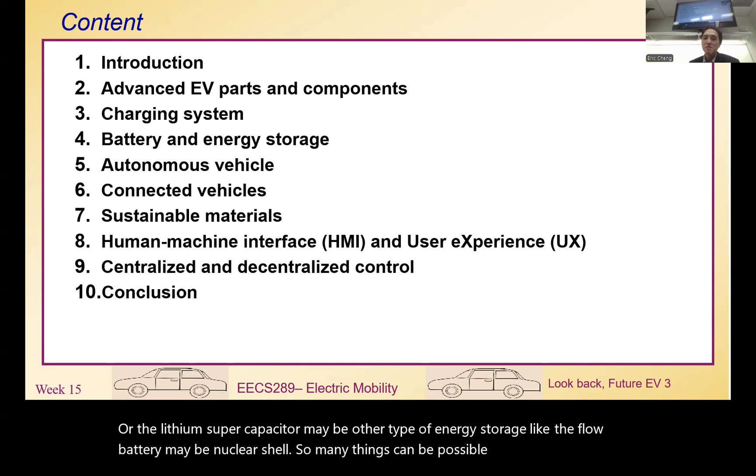Maybe other types of energy storage like the flow battery, maybe nuclear cells. So many things can be possible. Number 5 will be autonomous vehicles. Of course, all the vehicles today do have some kind of autonomy. So how are we going to deal with them? What's the future development on this topic?

And then once we've got autonomous vehicles, we may think about the connection, how the vehicle can be connected. We call it the connected vehicle. So that could be one of the major topics. When all the vehicles have certain computational or AI components, then the connection will get easier and much better. So how we communicate between EVs can give a better advantage.

Number 7 will be sustainability. At the moment, in EV development, many components inside are not really sustainable. For instance, the battery. Most batteries only have a single lifetime. At the end of life, we just landfill them. So that's not really economic. That means we need to think about how to make the materials used in the EV more sustainable. So that's an important area.

At the moment, in most mass production today, we only think about how to manufacture the item at low cost. We did not think about recycling. So every day when you go to the transfer center, the dump site, you see a lot of rubbish, garbage there. They just throw away the old model because they don't care about how to recycle them. With green technology and environmental pressure, I think we need to look into how to use more sustainable materials.

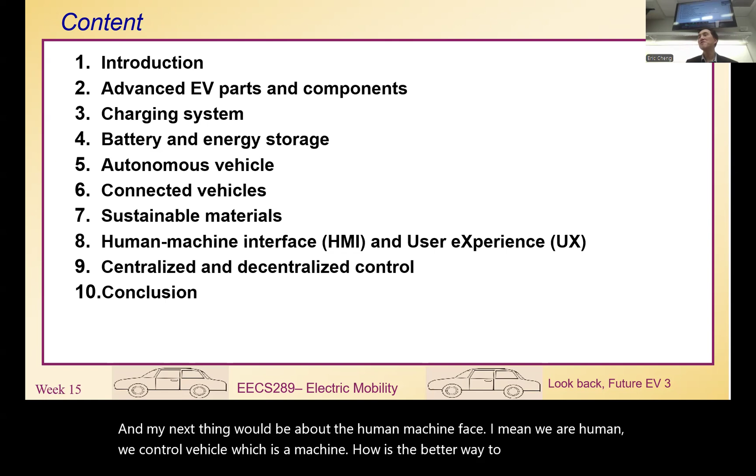And the next thing will be the human-machine interface. We are human, we control the vehicle, which is a machine. What is the better way to interface them? We call it HMI. We have so many different types or configurations for HMI. So how are we going to improve that? How do we control the vehicle? At the moment, we're using autonomous vehicles, but in the future, how are we going to connect the human to the machine?

And that also relates to user experience, how the user experience can help us determine the best way for HMI. And then we're also looking into centralized and decentralized control in EV design. There are a lot of configuration architectures in the EV system. Inside or outside the EV, we also have different kinds of configurations. So we're going to look into that. Those are the topics we're going to look into for future vehicle development.

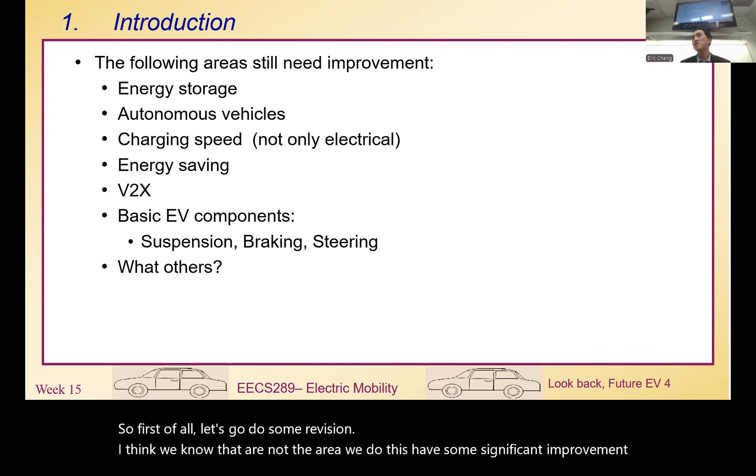So first of all, let's do some quick revision. We know that a lot of areas in EVs need significant improvement, including energy storage. We always complain about the battery, right? The battery, including energy storage density, safety, how to make it low cost, and the recycling problem. We always need improvement. So that could be one of the EV research topics we need to look into.

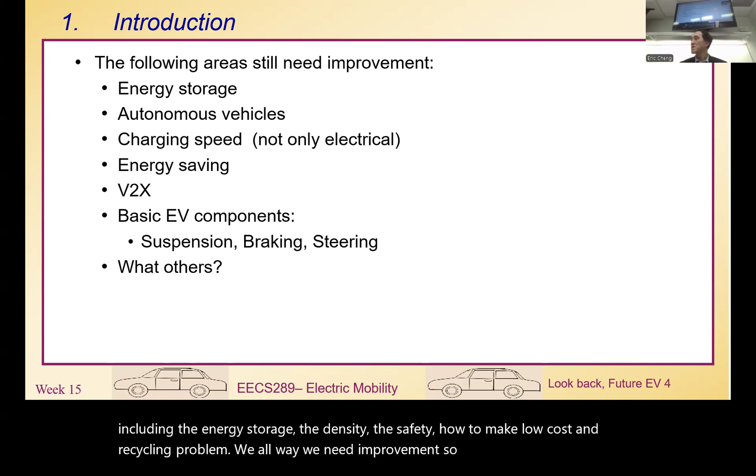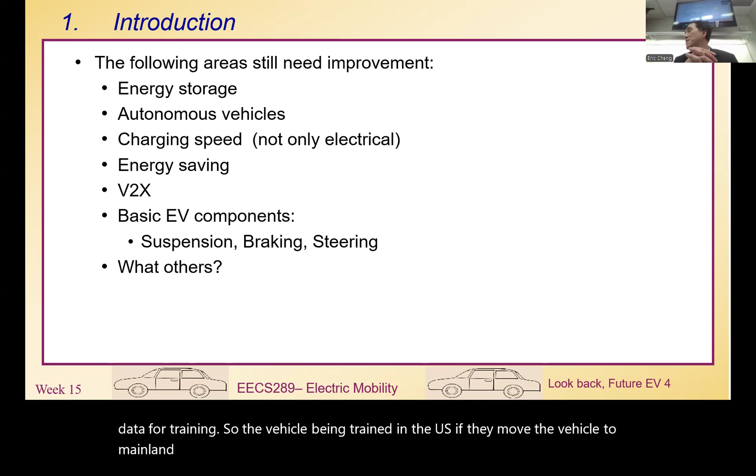And autonomous vehicles. Vehicles like Tesla have full self-drive capability. Once you pay $100 per month, they are able to provide that to you. However, there are still a lot of issues for autonomous vehicles, including training. We need a lot of data for training. A vehicle trained in the US, if you move it to mainland China, may not work really well because the road conditions are quite different. So we need a large database for the vehicle to understand the environment, to train it, because there are a lot of scenarios the vehicle needs to learn.

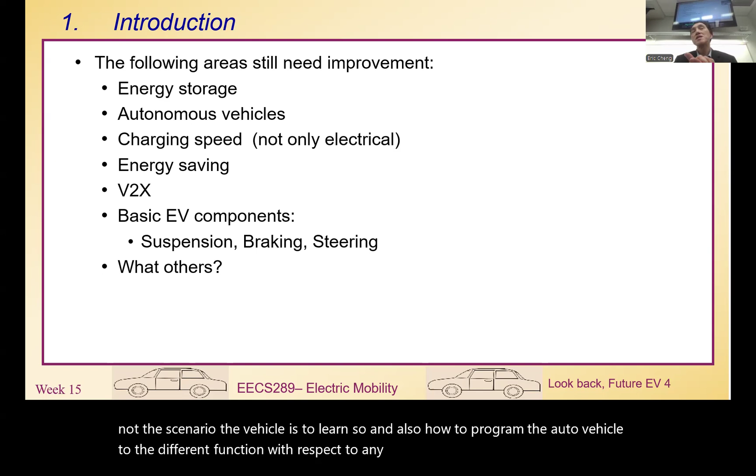And also how to program the autonomous vehicle to have different functions with respect to energy saving, operation, convenience, and also nighttime driving, whatever. There are many things we need to program for different directions, different performance.

And also charging. The key thing for each vehicle is the charging time. At the moment, rapid charging, ultra-fast charging, takes say 30 minutes. Of course, users prefer to have 3 minutes, right? So how are we going to do that? We know that we can't have too high a charging speed, mainly because of the power source. We don't have a sufficient power source. The charger power would become 10 times higher. That's impossible for power electronics. The size of the charging network would be too high. So it's impossible. We have difficulty understanding how to proceed with ultra-fast charging.

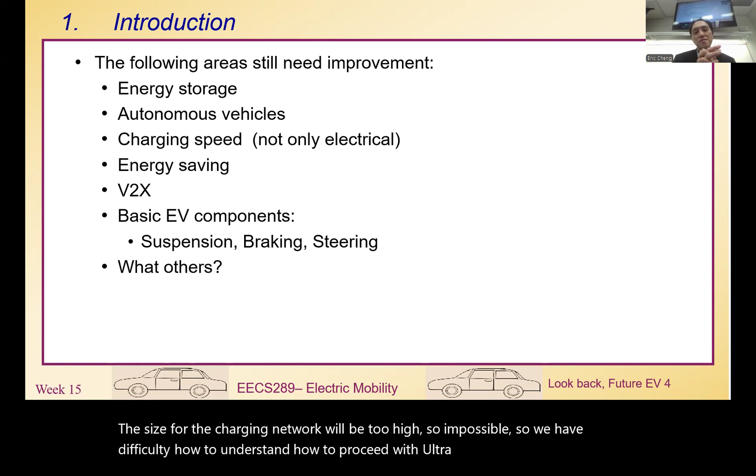And then we're also looking into energy saving, how to improve overall energy saving by improving the efficiency for each component or operation.

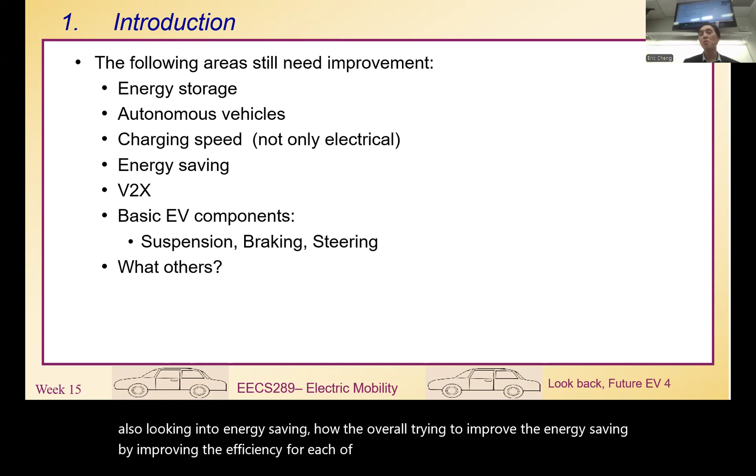Vehicle to everything is something we have been talking about for at least the last 10 years. We look into how the vehicle will connect to many other systems, including vehicle to vehicle, vehicle to building, vehicle to customer, vehicle to whatever. There are many things we can connect. So how to explore that and how to best perform it is something we need to look into.

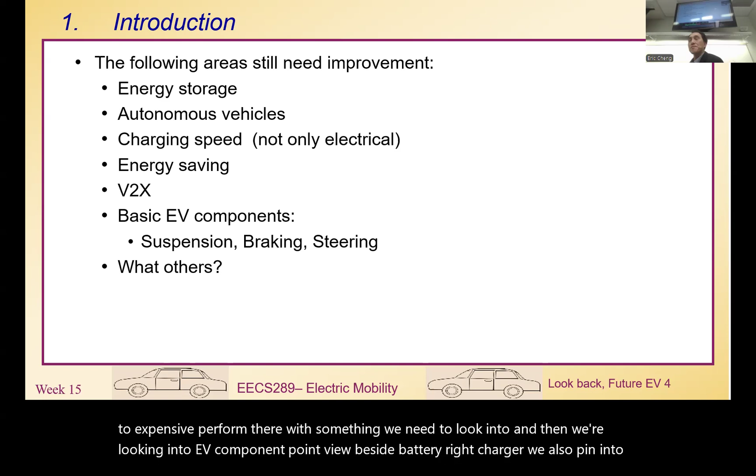And then we're looking from the EV component point of view, besides battery and charger. We're also looking into many other internal components. Many components in the past were mainly based on mechanical, pneumatic, or some kind of hydraulic system. But once you have electric, you can convert them into all-electric components, like the suspension system, braking system, steering system. You can convert them all into electric.

So that means how we develop these components. We do have many similar components in the EV, but we'd like to see 100% electric. Would that be possible? Which components can we take further to become more electric? So that's the thing we need to look into.

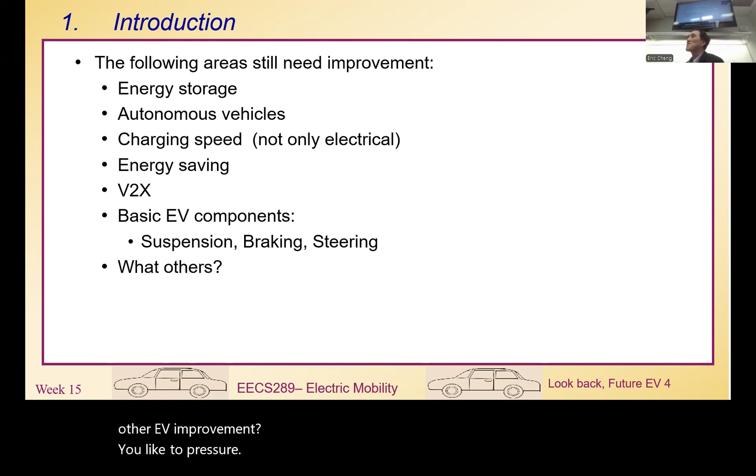What else can you think of besides these fields? Can you think of any other EV improvement you'd like to pursue? Any comment for this page? You've been working on this for nearly one semester, right? What other improvement would you like to have? What next research area? I'm trying to get more ideas from you to write my proposal. You see, these are the major areas we now have for EV, but I may overlook something. I need your support. What do you think? What next?

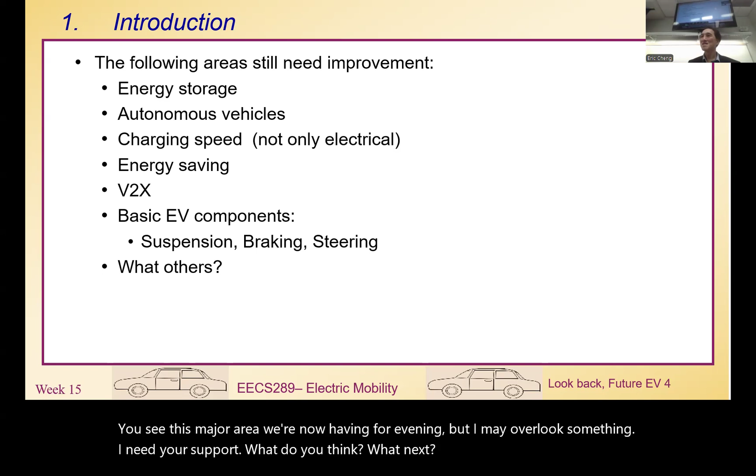Think about that. I will have one question in the final exam. One question will be, what do you think of besides this? What other area may you think of for EV future development? Okay. Anyway, let's look at different parts first.

You see, for advanced EV parts and components, there is much development on the motor. We'd like to develop new motors, intelligent motors, high performance motors. Even for the inverter to drive the motor, we want to find different kinds to do that, including how we integrate the motor together with the inverter. We're also looking into many power converters. In the EV, we have to manipulate different voltages, so we need higher efficiency and high power density for the converter.

Like the charger, we think in the next few years the charger power level needs to go up. So instead of 30 minutes, say 3 minutes, maybe not 3 minutes, 10 minutes, we anyway increase the power a few times higher. With such high power, how are we going to do that? How do we improve the power electronics to do the job?

Motor. We tend to integrate the motor and the wheel together, in the so-called technology called direct drive. Direct drive is a technology we'd like to see for the connection between the motor and the wheel. Direct drive tries to minimize the physical connection between the motor and the wheel. So in this case, we can reduce all the mechanical connections.

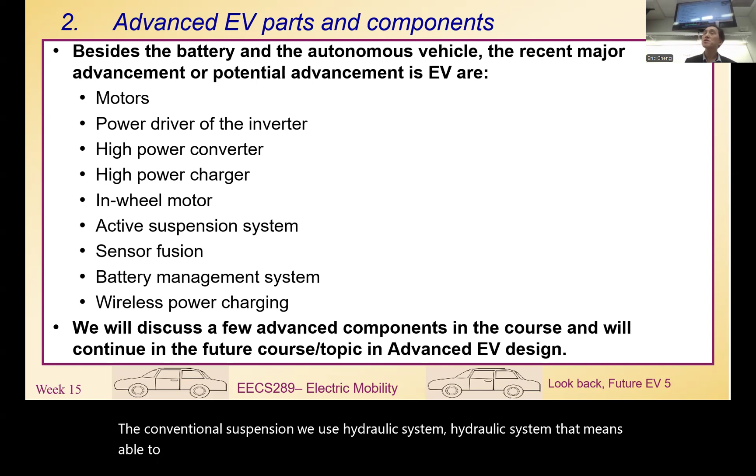The conventional suspension uses a hydraulic system. A hydraulic system is able to provide high force, but it is not adaptive. Not adaptive means if your vehicle passes through a lot of humps or uneven surfaces, you can still see the vibration, because all the road areas are different. You can't have a single suspension able to adapt to all the different road surfaces.

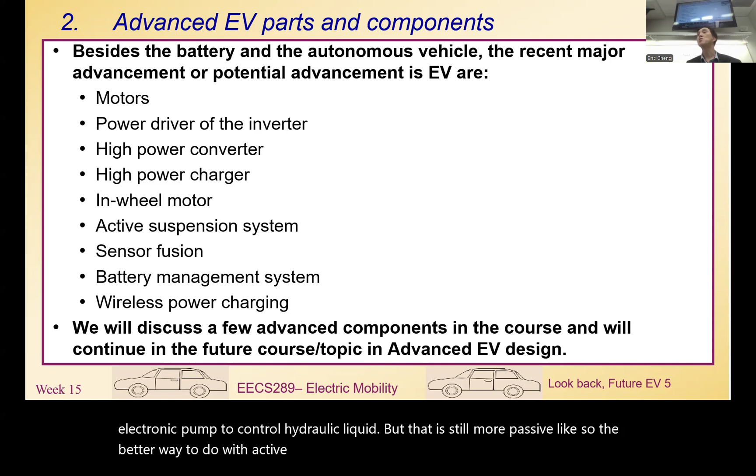So that's why conventionally this suspension is called passive suspension. They use some electronics to control it, to make it better, using an electronic pump to control the hydraulic liquid. But that is still more passive-like. So the better way is active suspension: you use a linear motor or some electronic actuation system to replace the suspension. That's the future work we need to do.

Next thing will be the sensors. Our vehicles today are getting more and more sensors. Conventional vehicles don't have that many sensors. We may have a tail sensor to detect when you reverse, maybe other sensors, but not many. But today, electric vehicles have many sensors. Like a Tesla vehicle, 8 cameras to view all the angles. And then you also have GPS and a lot of speed sensors, many things.

So in the future, we need to think about how to integrate all the sensors together, called sensor fusion. How to fuse them together and then see which sensor would be more important for the driving condition, for the present road condition. So that's important.

Another area will be the battery management system, BMS. The battery is getting more complicated. Today we not only talk about the battery; it could be something else, a supercapacitor, an integration between battery and supercapacitor, or a fuel cell. So all this energy management system, not only battery, will also need further work.

So how to ensure that each battery cell inside the battery system is in good condition, healthy, and safe, and can share the voltage and current properly. Because a vehicle has hundreds of cells. How to manage hundreds of them? You can't put on hundreds of sensors, too costly. You don't know which one is which, right? So that's also a lot of management thinking.

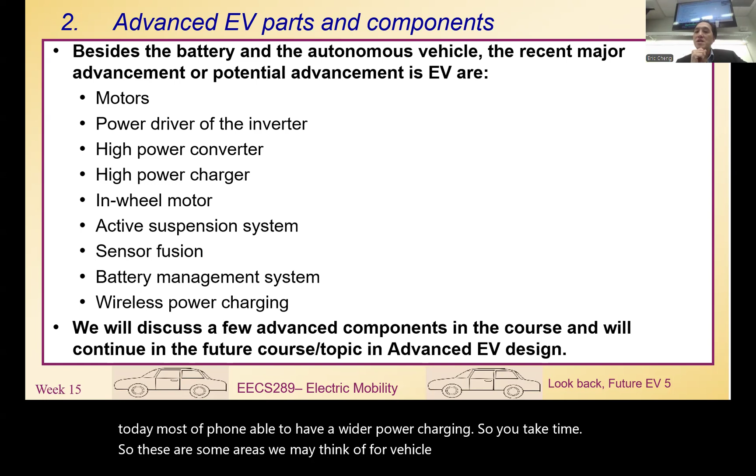However, at the moment, really few vehicles, especially commercial vehicles, have wireless power charging yet, because the facilities are not here yet. But that will be a really important area of development. As I mentioned before, with phone charging 20 years ago, we didn't think about wireless power charging. But today, most phones have wireless charging. So it takes time. These are some areas we may think of from the vehicle point of view for future advancement.

So that's why you can see that in today's electric vehicles, we don't need the hump under the rear seat, particularly on the rear axle, which we usually had before. And in the central console, we don't have any transmission there, so we don't have this kind of hump there. So using the in-wheel motor, we're able to improve the interior design much better than in the past.

And also, of course, we're looking into the weight. The weight will be much lighter, and the efficiency could be higher. Why is that? Because we eliminate all the mechanical connections: gearbox, clutch, transmission, shaft, they are all eliminated. If each component is 90% efficient and we eliminate 4 of them, we have an improvement of 40% efficiency. That's nice to have.

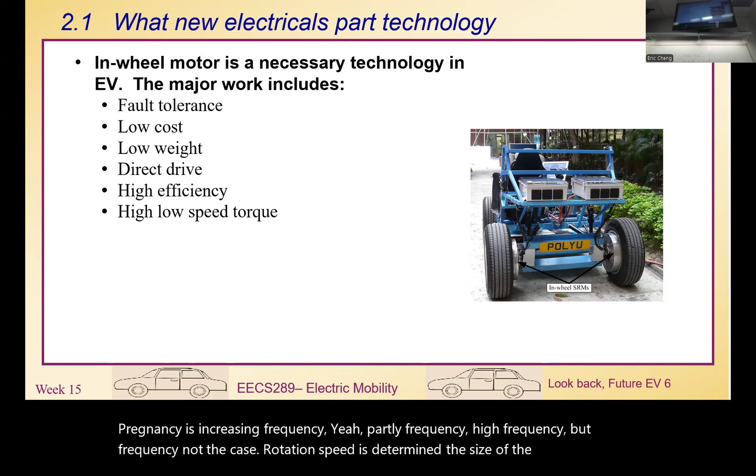Why can they do that? The magnetics have not changed that much. The magnetic design cannot change from that size into that size within 50 years. The Maxwell equations are still the same. Frequency? Yeah, partly high frequency, but frequency is not the case. Rotation speed determines the size of the motor. We still prefer to use 3,000 RPM, 5,000 RPM. Due to the rotation speed for the wheel, 500 RPM is still a disaster.

But what they have done is forced cooling. Why has their motor become so small? They use less copper, less iron, but forced cooling, liquid cooling. In this case, they can remove the heat instantly. They always keep the temperature of the winding low, so they don't produce any more heat. They're just using a pump to pump the liquid to cool. That's the way to improve the power.

But for an in-wheel motor, can we do that? Can we have forced cooling? More complicated, because the wheel is rotating. How can you deliver the liquid to the motor? Most in-wheel motors are air-cooled. Air-cooled and liquid-cooled differ by so many thousand times. So that's why we have a lot of difficulty in in-wheel motor design. That's the research area we look into.

There's also fault tolerance, because with anything exposed to the atmosphere, the fault conditions need to be reconsidered. We have less protection, right? Exposed outside, there can be damage, dust, water; shielding, everything needs to be reconsidered. So those are the research areas we look into for the in-wheel motor.

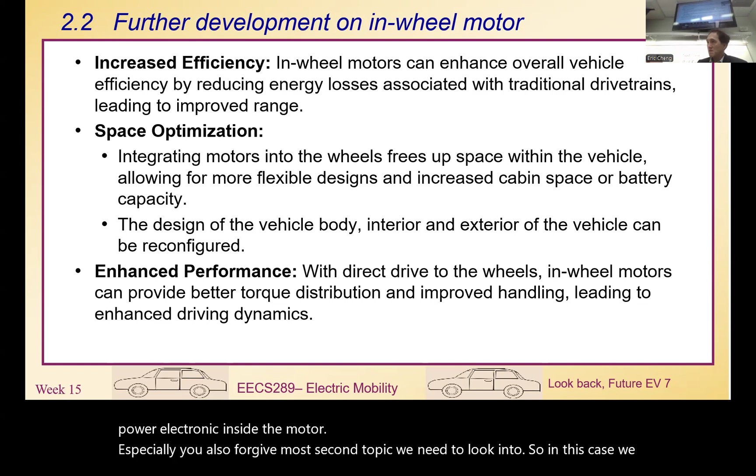And also enhance the performance of the motor drive. So usually, nowadays, we tend to put the motor driver, like the inverter, together with the motor, integrate them in a single component. So inverter integrated in the in-wheel motor as well. We try to integrate them. So sometimes you think about, can we also put the power electronics inside the motor? Especially also for the in-wheel motor. This is another topic we need to look into. So in this case, we can just put DC wire to the in-wheel motor, that will simplify everything. So that's another interesting topic we need to look into, also a major topic.

And modular design, how to make the motor become modular. So in this case, if you want to change the motor, it's quite straightforward, you can just use a modular method to change them. And also how to control that. And not only the control method, the control including the safety, the steering, the power conversion, and also a lot of optimization we need to look into.

And then we're also looking into material development. What kind of material can we use? That material should be able to be exposed to a wide temperature environment. You see, when a motor is inside the vehicle chassis, then the temperature is more controllable. But when the motor is outside the car body, the temperature variation can be much larger. For instance, some magnetic material inside, you expose to the external part, then during the day, temperature can be really, really high. At night, the temperature can be really low. The magnetic material could be a problem.

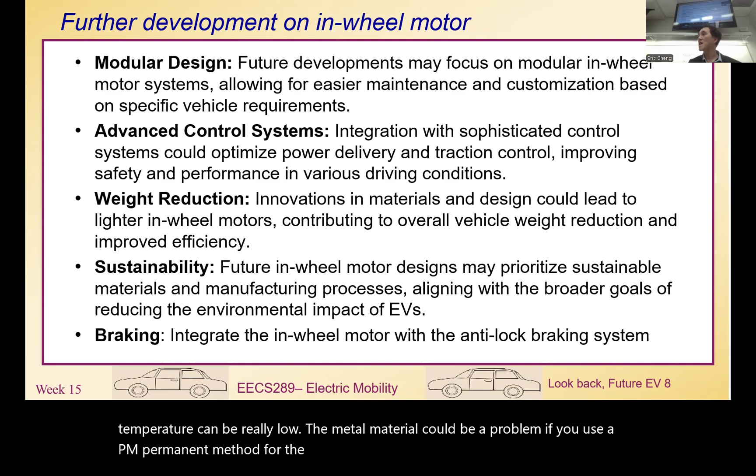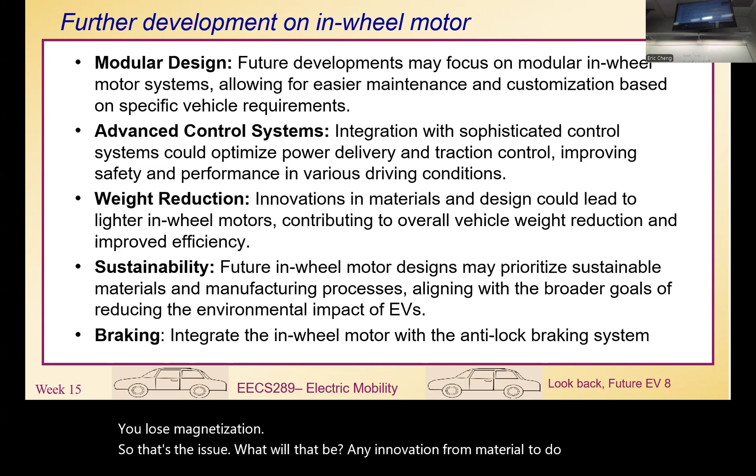If you use a PM, permanent magnet, for the motor, then you probably can have a smaller size of motor. But permanent magnet is not really happy about a wide temperature range. Especially at high temperature, you lose magnetization. So that's the issue. Would there be any innovation for material to do? And how to reduce the weight, improve the efficiency? That's also something we need to look into.

And also sustainability, how to make all the material and manufacturing capability sustainable. Material can be recycled. Because you see, a motor, when you expose it to the atmosphere, probably the lifetime may be reduced. Then we may need to replace the motor more often than before. So in this case, we may need to think about, can the motor become sustainable, recyclable?

Another issue is about the braking. The motor, of course, itself can provide electronic braking. But usually for all EV motors, by law, we also need to implement mechanical braking for safety. One will be electronic braking using power regeneration, plus mechanical braking for safety, for last-moment braking. So that means when you put them together, we got two braking systems inside the vehicle.

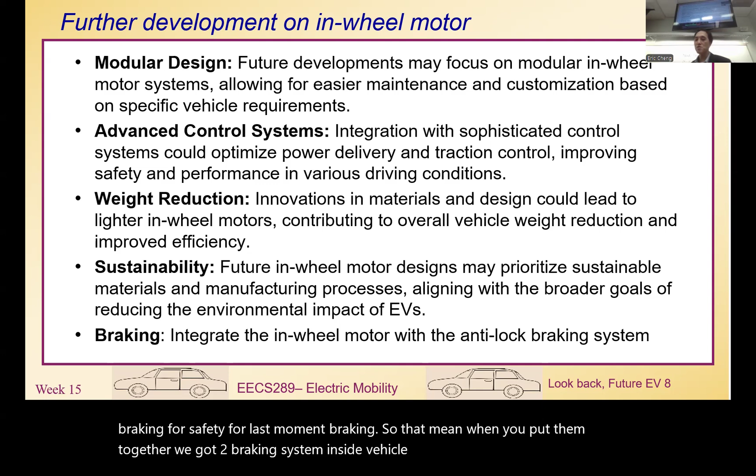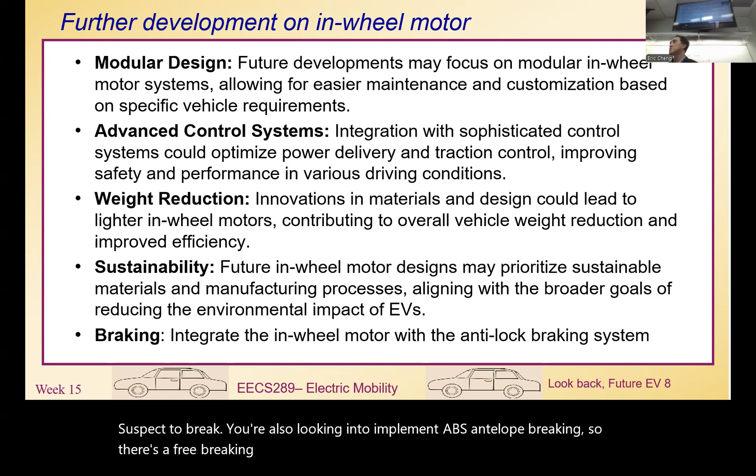Plus, you're also looking into the anti-lock braking system. Lock means usually the brake pad or the shoe pad to brake. You're also looking into implementing ABS, anti-lock braking. So there's three braking technologies you all need to put into the EV motor. So how to manage them properly is something we need to look into.

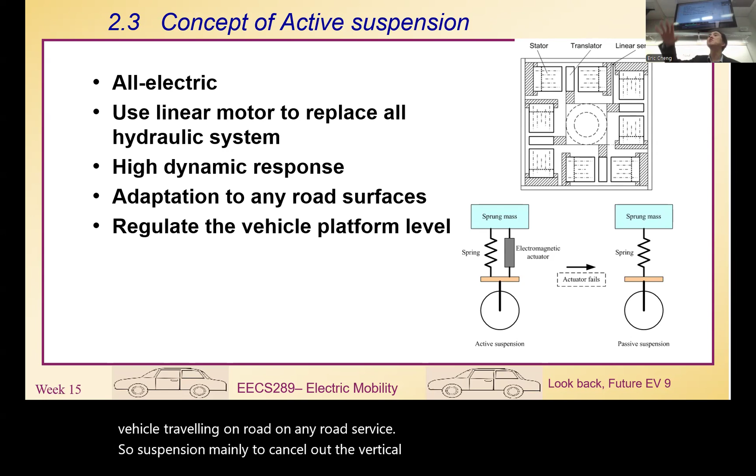So another important area is called active suspension. Suspension now is not so critical a component. Without suspension, the vehicle can still move, but it just feels too bumpy. You're not comfortable. With a nice suspension, when you sit in the vehicle, you won't feel anything when the vehicle is traveling on any road surface. So suspension mainly is to cancel out the vertical acceleration, due to gravity, due to bumpy surface.

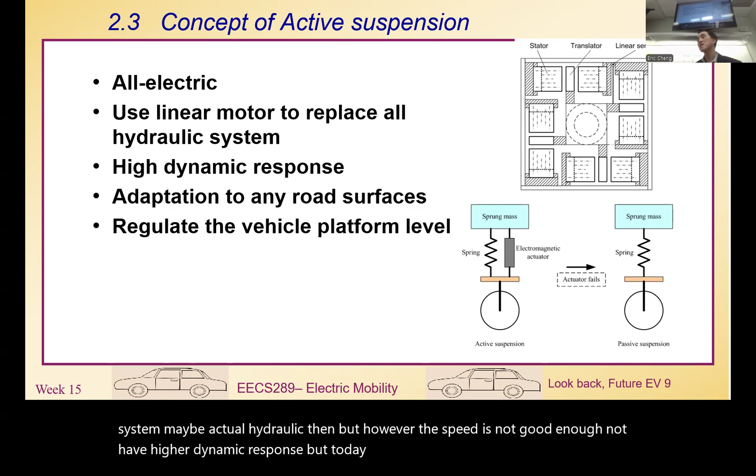Conventionally, all suspensions are using a hydraulic system, maybe electro-hydraulic. However, the speed is not good enough, it doesn't have high dynamic response. But today, in this research area of future development, we want to use motors, 100% motor, to replace the hydraulics, because a linear motor can be 800 times faster than a hydraulic system. So that means in the vehicle, when you traverse any bumpy or uneven surface, all this vertical vibration can be canceled out. So suspension mainly is adapted to the vertical unwanted acceleration due to gravity, due to the road surface.

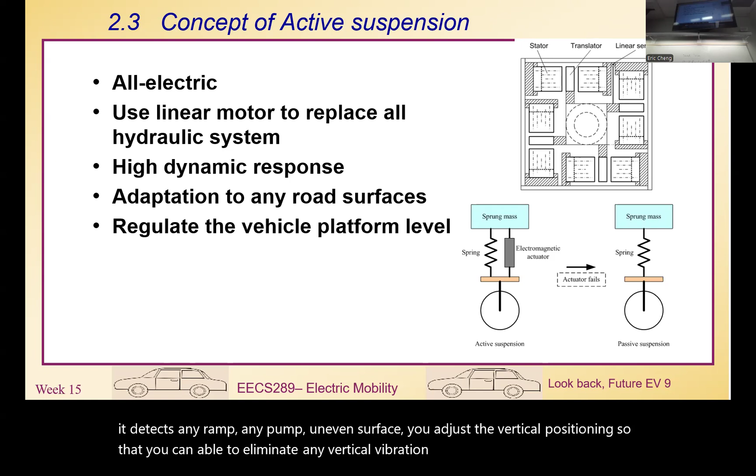So in this case, this diagram shows you one of my developments. We use 4 linear motors to control the movement of the 4 corners. Whenever you detect any ramp, any bump, uneven surface, you adjust the vertical positioning so that you are able to eliminate any vertical vibration. So that's the function of this. That means we are able to use a more active method, an electromagnetic actuator, to replace the shock.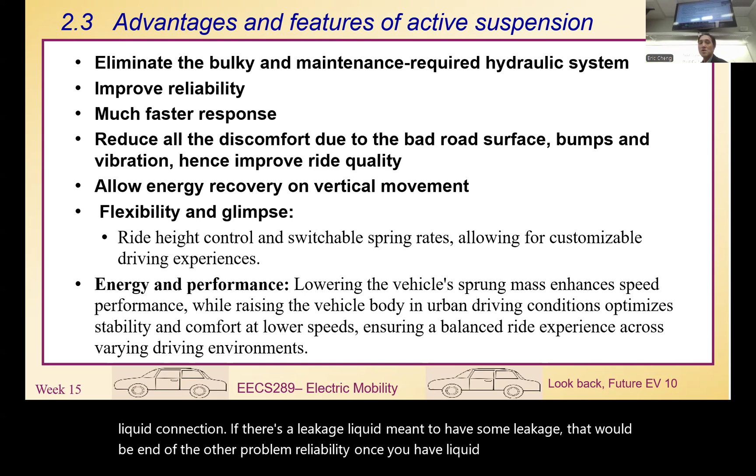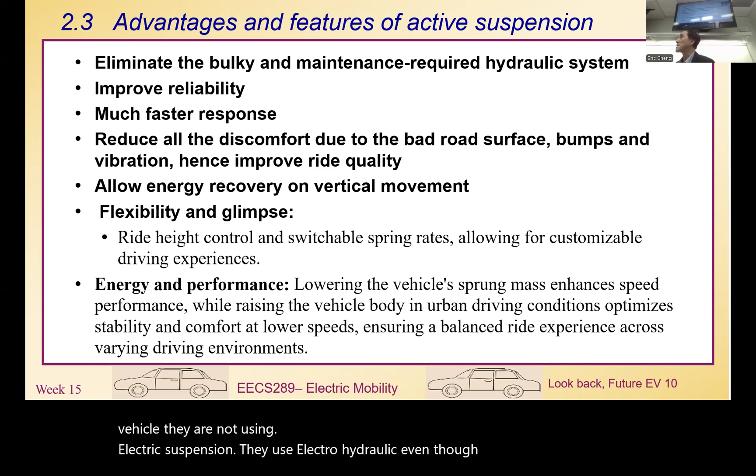So the good thing for the active suspension area will be you are able to eliminate the hydraulic system, because whenever we use a hydraulic system, we know that we need maintenance. With a hydraulic system, you need to maintain the liquid, you have to pump, you need to maintain all the liquid connections. If there's a leakage, that will end up with other problems. Reliability: once you have liquid flow in your vehicle, then you do have reliability problems. Right? Even today many electric vehicles are not using electric suspension, they use electro-hydraulic, even Tesla, because they don't have that technology yet. So that is a topic we need to go into.

And also you can see that once we have this kind of active suspension, any vertical movement, we can convert this vibration energy to go back to the battery. So in a way, we can have further energy saving. And also, it's also gimmicky. Once we do that, we are able to adjust the vehicle sprung mass. You know what sprung mass means?

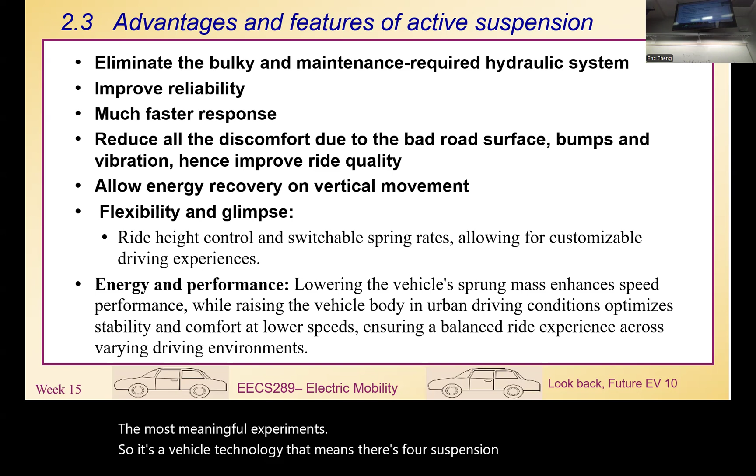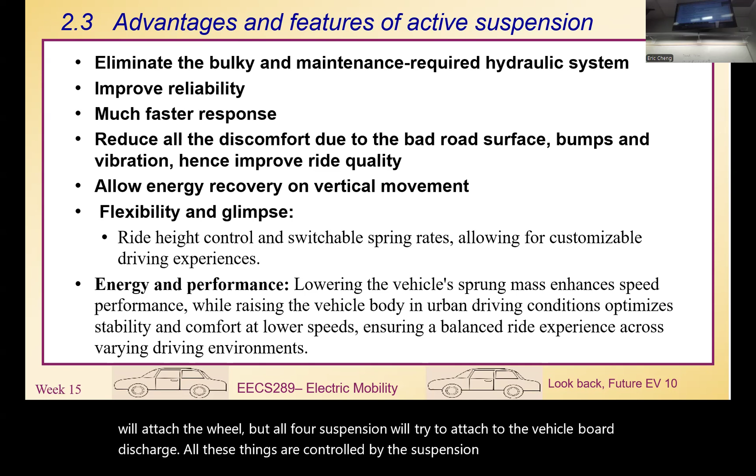It's a vehicle technology term. There's the suspension here. The suspension attaches to the wheel, but all four suspensions attach to the vehicle body chassis. All these things are controlled by the suspension. We call it sprung mass. So that is to say, for the whole vehicle body, when you sit in the vehicle, the vertical position of the sprung mass can be adjusted by the suspension. In some high performance vehicles, when someone wants to sit in the vehicle, they lower the vehicle body to let you sit easier. Once you sit inside, they raise the vehicle body because they use active suspension to control the vertical positioning.

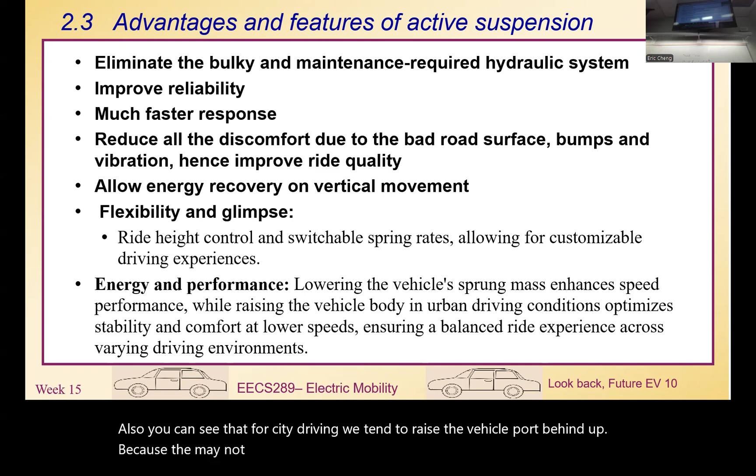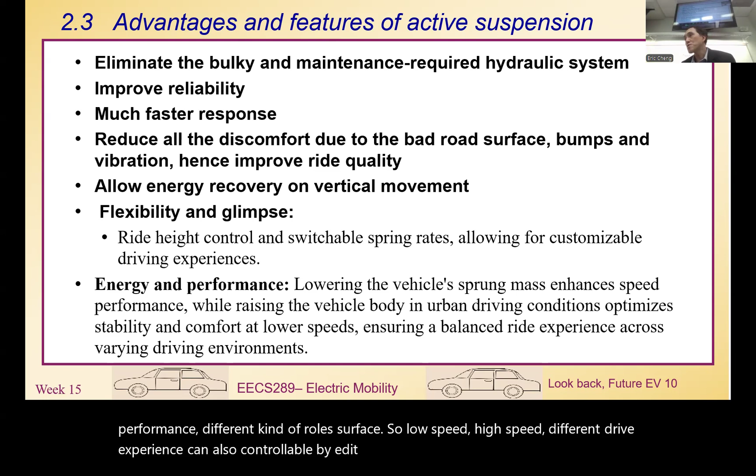Also, for city driving, we tend to raise the vehicle body because the road surface may not be too even. There are a lot of road works there. But on the highway, the road surface will usually be more flat. They will lower the vehicle body so that you can reduce the air resistance. So the active suspension is able to support different performance, different kinds of road surface. Low speed, high speed, different driving experiences can also be controlled by active suspension. But if you use hydraulic suspension, you don't have that capability. So for future vehicles, we do need to integrate this kind of active suspension feature to improve that.

So the difficulty in design will be how to maintain high force in the vertical suspension. For an electric vehicle of, say, 4 tons, each suspension needs to control 1 ton, 1,000 kilogram force. That's not a simple job. And also you need to maintain high speed. When a vehicle passes over a bump, you usually need to finish the whole response in about 10 milliseconds. So 10 milliseconds plus 1,000 kilogram force is not an easy job. The power level for the suspension is quite high, but you need to control it with a small coil. So the magnetic design is quite difficult. That's another area we're not quite sure how to do properly.

We have that demand. For electric vehicles, the weak point is we have to integrate with a hydraulic system. The whole vehicle is all battery and motor, but the thing left behind is the suspension. Suspension is still hydraulic. But we still don't have a good solution to make the suspension all electric. When you go for electric vehicle maintenance, you need to check the suspension liquid, suspension performance. In theory, you don't need to worry too much about maintenance for EVs, but not for all components. Suspension is something we need to look into. And another thing: once you use the linear motor, you need to adjust the vertical position.

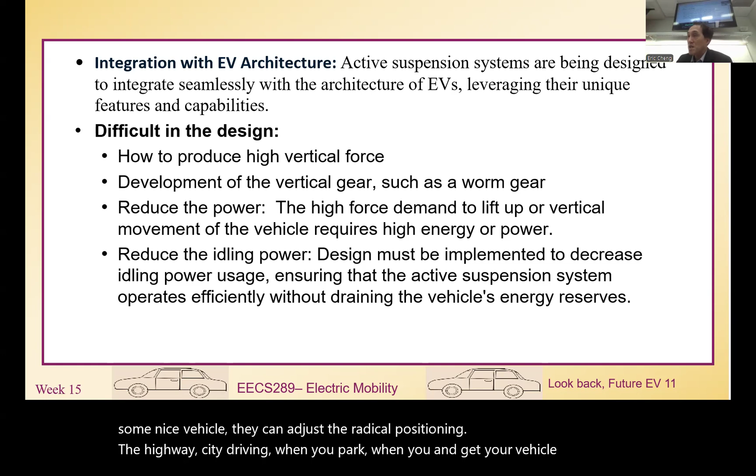There are some cars which can adjust their height, right? Yeah. You go down, like, while standing. So that's also the normal hydraulic suspension. A hydraulic system can adjust the vertical position. Just like when you go for some nice vehicle, they can adjust the vertical positioning. In highway, city driving, when you park, when you get out of the vehicle, they can adjust it. But they are using hydraulics. Hydraulics can do the job without any problem.

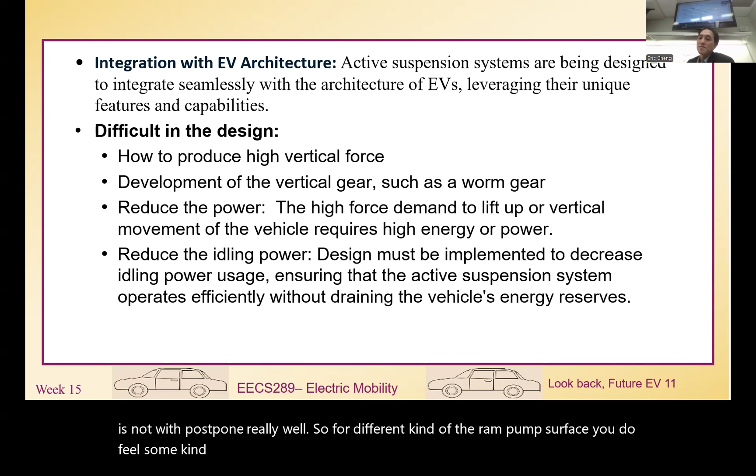However, the response time for hydraulics is too slow. When you go over a ramp, it doesn't respond really well. So for different kinds of ramp or bump surfaces, you do feel some kind of vibration, which you don't quite like. That's why we go for active suspension, but active suspension still has a lot of issues we need to research. It's not sufficient to overcome everything, but we'd like to have an active suspension to eliminate the hydraulic system or the mechanical system. So that's one of the developments we'd like to see in the near future for EV.

Another area will be wireless power transfer for charging. Of course, we know that wireless power transfer is actually a major topic in electric vehicles or in power electronics. I think if you look into all the research publications, roughly about 25% of all the papers are in this area. So it must be a big research topic. So many researchers are looking into it, although it's still not yet in real application. That means many researchers, many professors think it's a really important area.

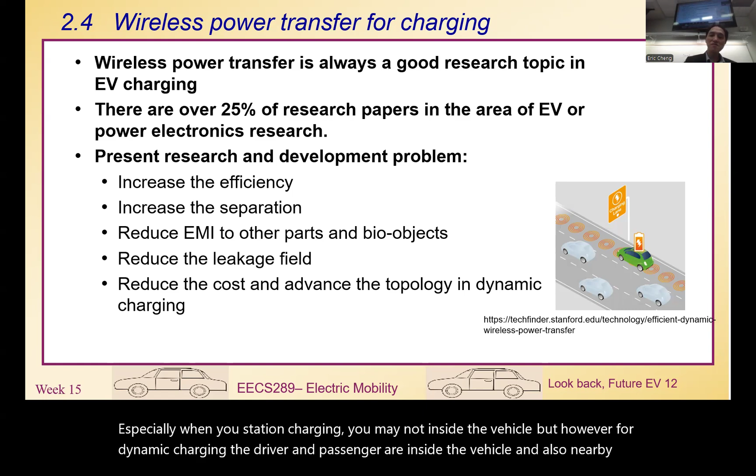Then would that affect the user? With stationary charging, you may not be inside the vehicle. However, for dynamic charging, the driver and passengers are inside the vehicle, and also nearby pedestrians. So that's something we're not quite sure how to examine. That's not only an electrical engineering problem, but also medical research.

The investment must be quite high here. You can see the many coils. We need coils, so we need a power supply, we need an inverter. And then the cost is not quite sure. It certainly will be expensive, but how are we going to reduce the cost, simplify the technology, simplify the topology to do that? So that's the thing we need to look into.

Next thing is the charging system. The charging system always becomes important for EVs, right? For the charging system, we prefer really high power charging, so charging within a few minutes is something we'd like to have. With high power charging, we need to look into the cooling, thermal management, efficiency, power density; all these things will be good research topics.

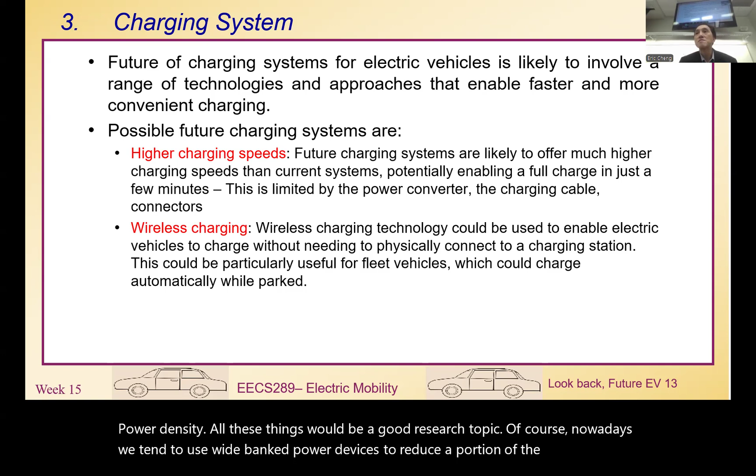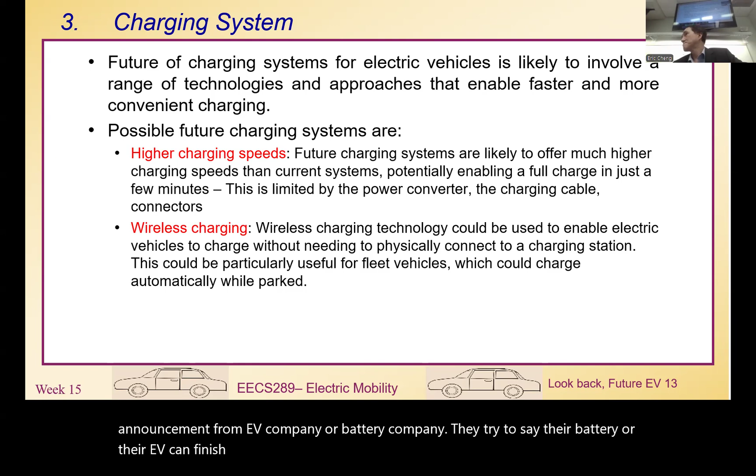Of course, nowadays we tend to use wide bandgap power devices to reduce a portion of the problem, but the problem is still there. But high power charging is one of the important developments anyway. All the research papers, all the major announcements, they all talk about how their battery or EV is able to charge within a short period of time. That's usually an announcement from an EV company or battery company. They try to say their battery or EV can finish charging in a few minutes. That's an interesting point, but the technology is still not there yet.

Wireless power transfer still needs further development, how to implement it properly in the vehicle. So that's something we need to look into. And the charging system also includes the research of V2G, vehicle to grid. I think vehicle to grid is mainly bidirectional charging for the vehicle. Today, 99.9% of vehicles are not developed for V2G. They only have unidirectional, not bidirectional. Then how to do that? We need cooperation, maybe international guidelines or legislation to do that.

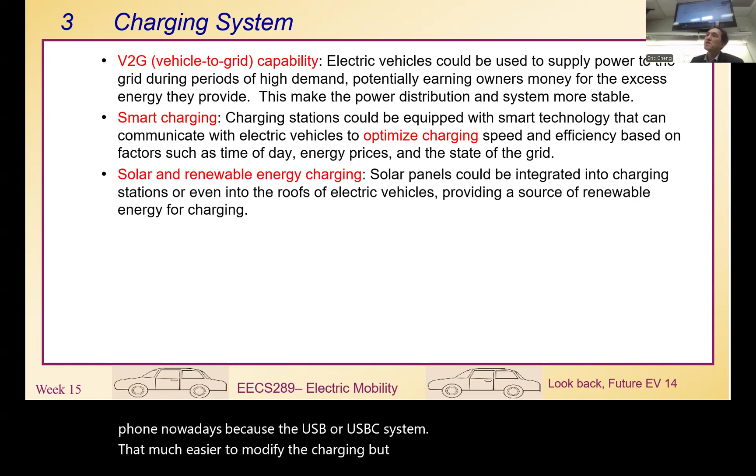The thing is, all the EV companies are separate or located in different countries, with different systems. How they can unify into a single system for the grid is uncertain. Even the power grids are all different in different countries. So that's why V2G is really a big problem. It's different from phones. Phones nowadays have USB or USB-C, so it's much easier to unify the charging. But for vehicles, different vehicles have different voltages. Different countries have 100 volts, 120 volts, 110 volts, 220 to 380. They all have different voltages, different frequencies, different kinds of systems. So V2G is still a major issue.

Smart charging. How to make sure a charging station can communicate with other charging systems. When we have a limited number of chargers but an uncertain number of vehicles, how do we mesh them together? You need really good scheduling, very good timetabling, really good power connection. So all this will be another issue.

And also safety. Today we have another new requirement for charging stations to have safety implementations, including, in case a vehicle catches fire during charging, how you're going to accommodate that. As we mentioned last week, fire disasters happen much more often during charging than while the vehicle is in motion. So charging needs to look into safety as well.

Then because of green technology, we also think charging should be related to renewable energy. How we implement solar power, wind power, hydropower, or maybe solar vehicles together. That's something we'd like to see in future charging systems. Today we are working on a project trying to convert a whole UC vehicle, the golf car, to solar power. We'd like to see solar power used to power up vehicles in the near future. That is quite feasible because for many vehicles with really light loads, say a golf car, the power level is only a few hundred watts, so we are able to use solar power to produce the energy without using charging.

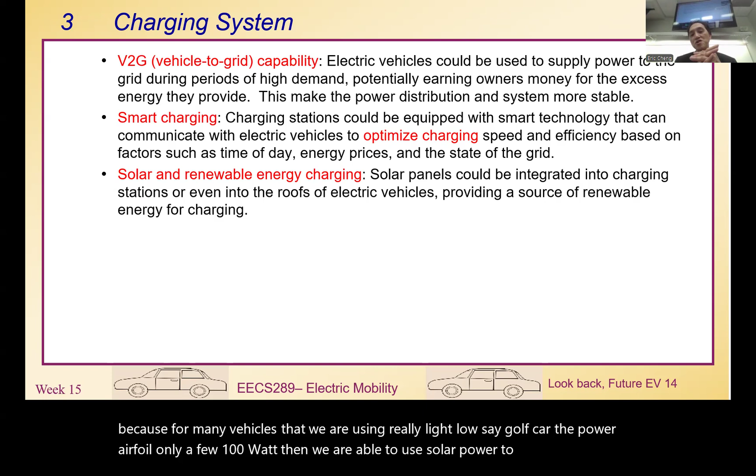We're also looking into battery swapping, right? We have been discussing battery swapping for quite some time. We know it will happen, but which one will be the winner, we're not quite sure. Battery swapping and direct charging are two completely separate concepts. Battery swapping has been quite successful in a few locations and also in scooters, but we're not sure whether it's possible in large vehicles. With large vehicles, we need robots and machines to do the swapping. So in this case, we need a lot of support from the government.

So dynamic charging, or so-called move and charge, is another technology. It's a major discussion in all charging systems. But beside these two, we're also looking into charging not only by electrical means, but also by other means. Like the flow battery I discussed with you, we are using a liquid form of charging, charging the vehicle using electrolyte. So that will be much similar to gasoline charging. Of course, battery swapping is another way. We don't need to use electrical means to do that.

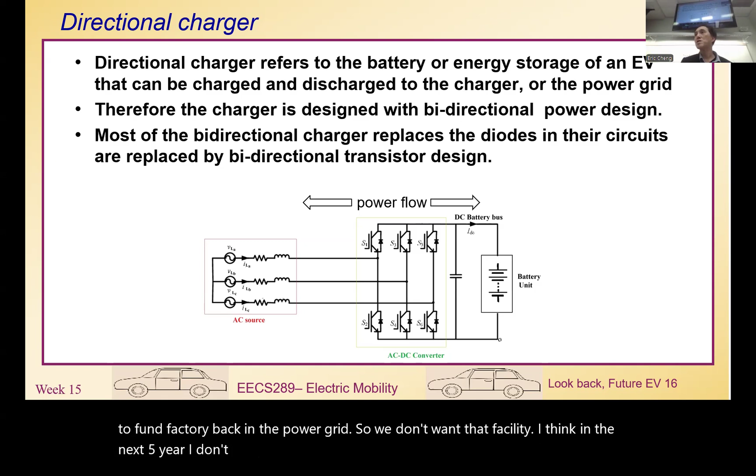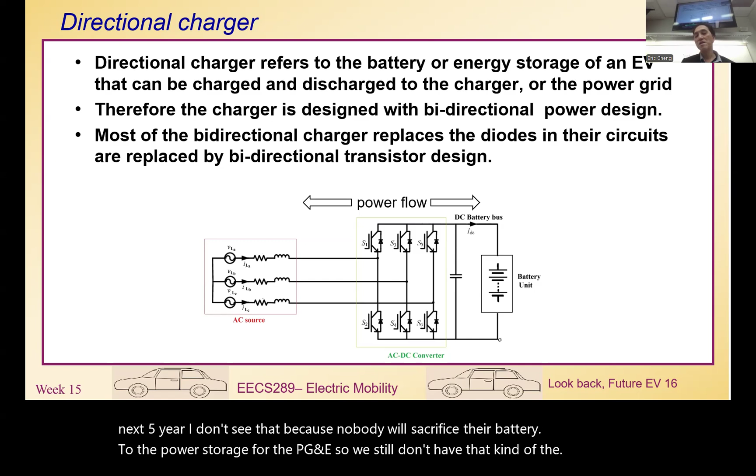At the moment, we don't have that, because for high-speed charging we use DC charging. They are all unidirectional. We don't allow power from the battery back into the power grid, so we don't have that facility. I think in the next five years I don't see that, because nobody will sacrifice their battery as power storage for PG&E. So we still don't have that kind of development. We wait and see for a few more years for any further work.

Number four is about the battery. The future development for batteries is something quite strange. Besides the normal batteries we've been talking about, like the lithium-ion battery, NMC battery, or lithium iron phosphate battery, a number of other batteries are being rapidly developed, like the solid-state battery. I think we also did some study on solid-state batteries. I asked you to check some YouTube videos about solid-state batteries, right? The major development for solid-state batteries is that the electrolyte will be solid. That will make safety much easier to control, and it seems the density, the charging speed, everything can be improved.

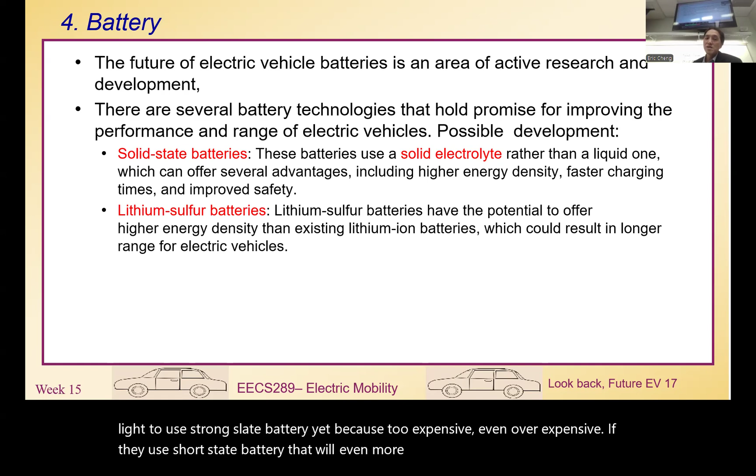But at the moment it's still very expensive and not yet mature. So no EV user likes to use solid-state batteries yet because they're too expensive. EVs are already expensive; if they use solid-state batteries, they will be even more expensive. So that means we need to wait for three more years.

Another similar lithium battery is called lithium-sulfur. From the publications, we see that this also has high potential. It has quite a few times the energy density compared to lithium iron phosphate or NMC batteries. So we wait and see if lithium-sulfur can have further development. Then other batteries like the lithium-air battery, lithium-oxygen. We also have the flow battery, and they are all possible.

Another thing is the fuel cell. At the moment, the hydrogen fuel cell has been developed quite well. But now we're looking at another development called the solid-state hydrogen fuel cell, using so-called solid-state to do that. So that's another newer technology we're looking into for fuel cells. At the moment, the PEM membrane fuel cell is getting some limitations because of the cost, the PEM membrane lifetime, and also the efficiency. So we're looking into new designs in hydrogen fuel cells to further improve that. But I think that will take a few more years.

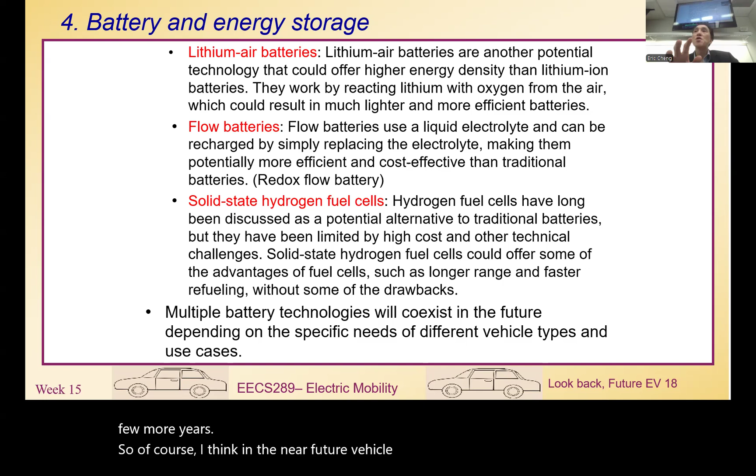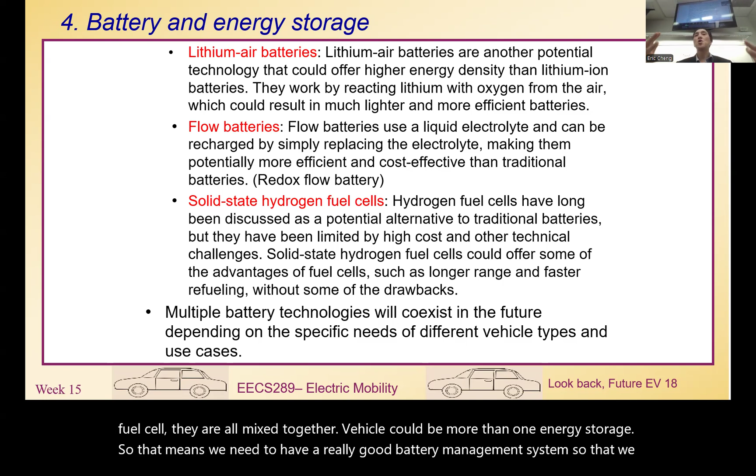Of course, I think in the near future, a vehicle could be a combination of many battery systems, including capacitors, batteries, maybe solid-state, maybe fuel cells, all mixed together. A vehicle could have more than one energy storage. So that means we need a really good battery management system so that we can combine and coordinate all the batteries together.

So materials are something we're also looking into for batteries, or maybe for many other energy storage devices. We're looking into better materials, including the electrolyte, the electrode, and the separator; they all need better materials. For nanotechnology, we have been talking about the electrode material. Today, electrodes just use solid material, but nowadays we talk about nanomaterials.

With nanomaterials in the electrode, we are able to improve the current density, which means they can handle high current. In a way, we can also improve the overall energy storage density, the specific energy. This material will also hopefully make the battery recyclable. Today, the battery is not recyclable.

So tomorrow, if we improve the material, we try to use recyclable battery materials so that from the day of manufacturing, the batteries are recyclable. Today, after we develop batteries, we're still looking for another way to recycle them. That is much more problematic.

For electrodes, we are looking into many new materials, like the silicon electrode that is being worked on nowadays to improve the electrode capability, and also conductive polymers to improve conductivity. So you can see there's a lot of new material work going on for battery development. Of course, 3D printing: we tend to use 3D printing to develop more complex battery architectures rather than simply an electrode plus a separator. That's another research area we can look into.

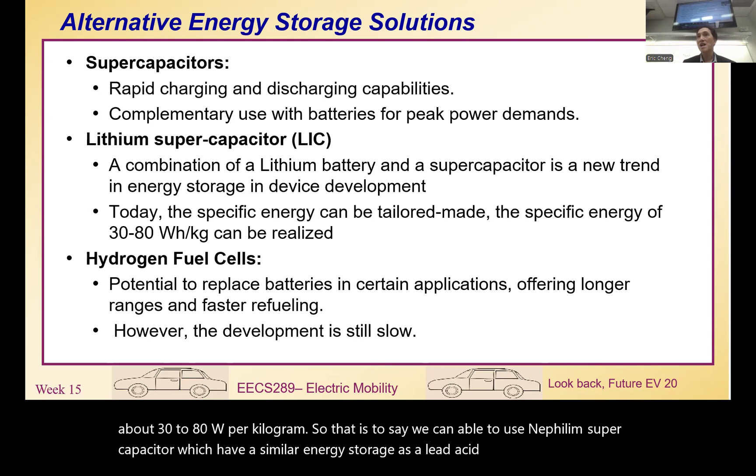But in the market, we usually see about 30 to 80 Wh per kilogram. That is to say, we are able to use a lithium supercapacitor with similar energy storage to a lead-acid battery, but the life cycle will be really good. The lifespan of a lithium supercapacitor is usually something like 10,000 cycles, maybe more.

So you are now using something like a lead-acid battery, but with a long lifetime and without the short circuit problem. With a supercapacitor, the short circuit risk is basically reduced. You can still have a short circuit with high current, but the capacitor will not explode. Chemical batteries explode because of chemical reactions and too high pressure. But for a supercapacitor, being electrostatic, the risk of explosion is less.

So the hydrogen fuel cell is another energy storage you can look into. We tend to use hydrogen fuel cells to replace batteries or replace a portion. But we see that development for hydrogen is still quite slow. As we saw in the presentation just now, the hydrogen fuel cell is still expensive and still has a lot of carbon emission. The hydrogen source is still a problem, so we do need to improve that.

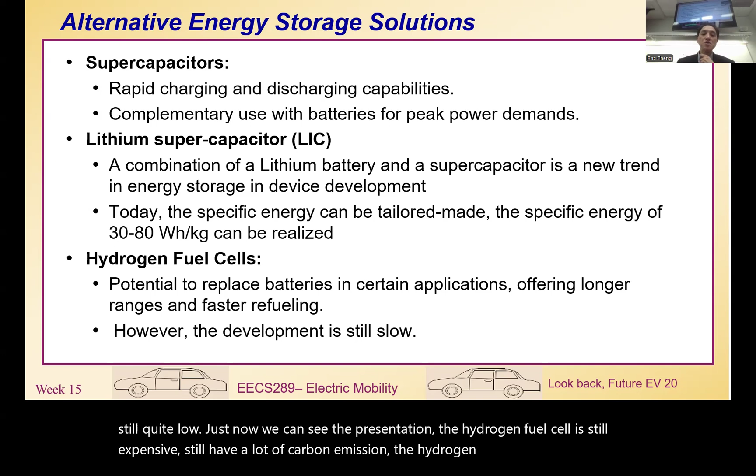So you can see the slow development of hydrogen systems is mainly about infrastructure. We don't have sufficient hydrogen stations yet. Usually stations are inside a city or on the outskirts of a city. For instance, between San Francisco and Los Angeles, we only have one fuel cell station. That's not good enough for intercity traveling.

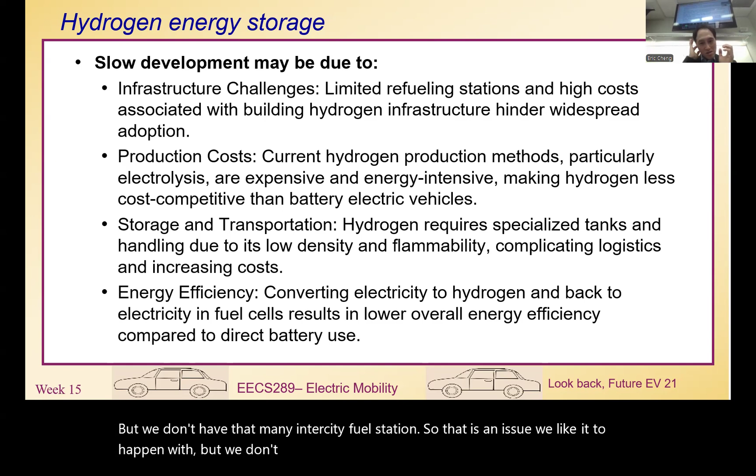With hydrogen fuel cell vehicles, we mainly try to use them for intercity traveling, but we don't have many intercity fuel stations. So that is an issue. We'd like it to happen, but we don't support it. That's why we have a big problem for hydrogen vehicles. Also the cost: hydrogen is still really expensive.

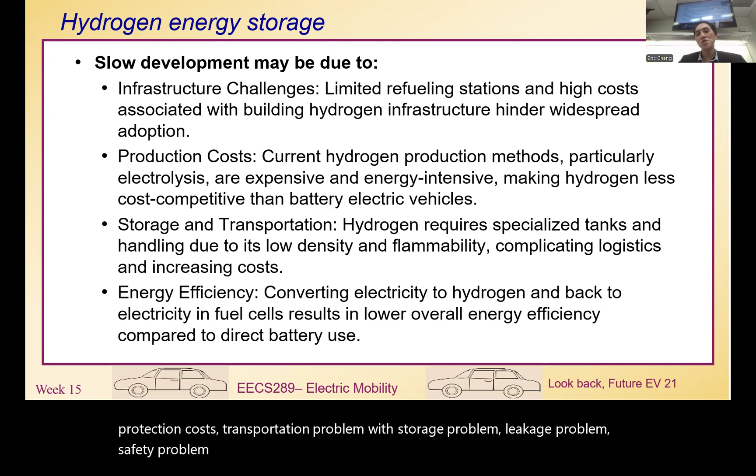And also other human factors, including public awareness and public acceptance; they are still scared about hydrogen. Many people, when they hear the word hydrogen, may think of explosion. So that's why they don't quite like to use them for EV.

And technology: you see, for the last 5-10 years, battery technology has been booming so much. I think 20 years ago, when we started to seriously consider hydrogen vehicles, battery was still not good enough. During that time, hydrogen vehicles tried to compete with the lead-acid battery, maybe the other low-performance nickel kind of battery. Then of course, hydrogen would be much better.

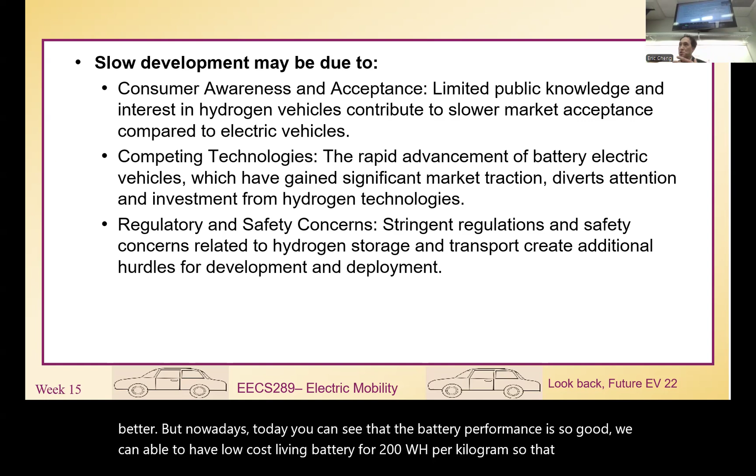But nowadays, you can see that battery performance is so good. We are able to have a low-cost lithium battery at 200 Wh per kilogram. So that means the advantage gap for hydrogen vehicles compared to battery is getting less and less. Having said that, hydrogen is still really expensive in terms of resources, but with battery vehicles we're able to make use of renewable energy. So the technology gap is not as good as before.

And also the regulation, the safety, storage, everything may not give any advantage to hydrogen vehicles. So probably after 10 years, you may tell me again what happened to the hydrogen vehicle. What do you think? Ten years from now, what do you think of hydrogen vehicles compared to battery vehicles?

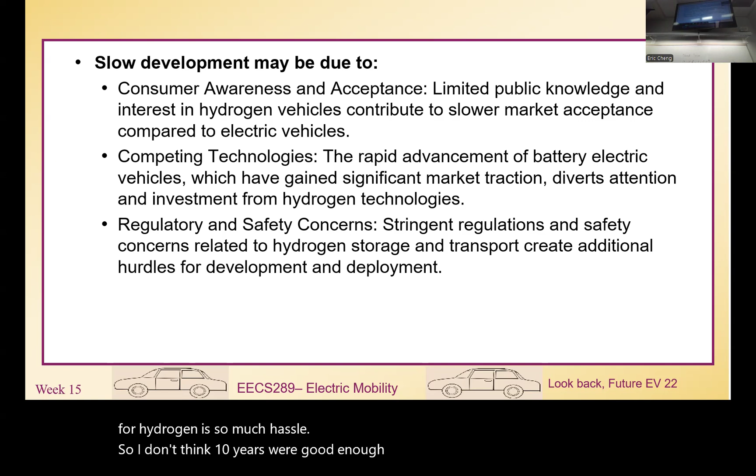Still will be difficult to adopt. Yeah, still difficult. You see, infrastructure for hydrogen is so much hassle. So I don't think 10 years is good enough for hydrogen unless there is some major change on planet Earth. Otherwise, I don't think anything will happen.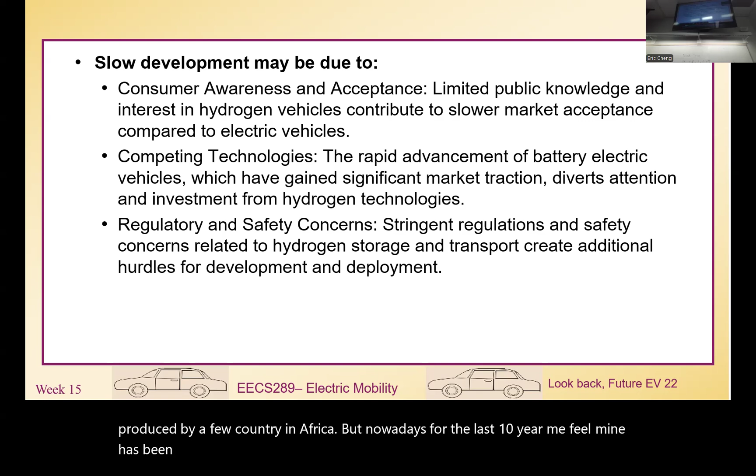You see, 10 years ago, I heard about the lithium battery problem because lithium was only produced by a few countries in Africa. But for the last 10 years, lithium mines have been everywhere. They have new locations for lithium, cobalt. May not be a problem. Although lithium, from my lecture notes, ranks about number 23 for world production, we still have a lot of lithium mines. So we don't have that major problem yet, and it's getting cheaper and cheaper every day.

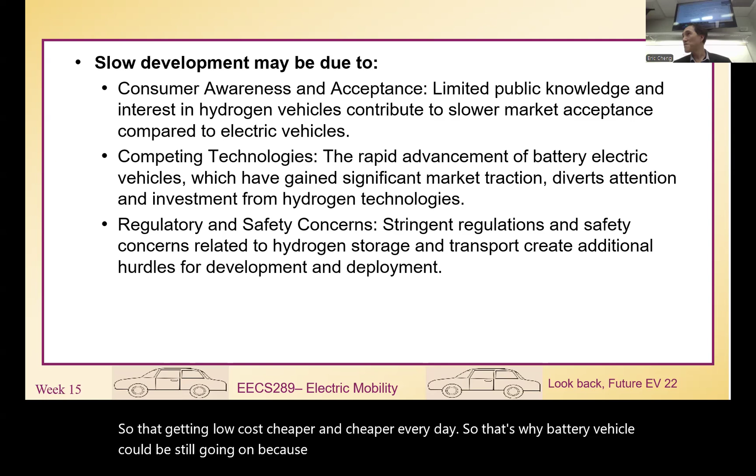So that's why battery vehicles will still be going on, because the response time for battery is good, the efficiency for battery is good, and we can also use renewable energy to power the battery. But with hydrogen, we don't have that many choices. The only green hydrogen we have is using solar power. It's really expensive. So I don't see a good future.

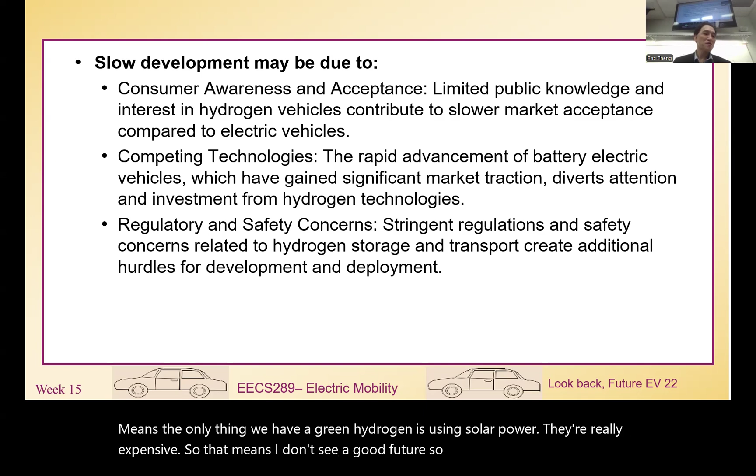Japanese people, 20 years ago, focused on hydrogen vehicles. After 20 years, still no success. The hydrogen fuel cell has been in the innovation map for 200 years. You can see my lecture notes. 200 years ago, we already developed the hydrogen fuel cell. But after 200 years, nowhere. So that's why in 10 years' time, I don't see any future yet for hydrogen vehicles.

But anyway, hydrogen ground vehicles may not be really successful. However, we do see some benefit for other vehicles, because for other transportation, like aircraft, that will be another story. In aircraft, usually the cost is not that significant. For road vehicles, cost is a major issue. But for aircraft, the profit margin will be much, much higher, so we allow more new technology in there.

First of all, for all transportation, vessels, aircraft, and ground vehicles each account for 1/3 of the emission. Aircraft have been using oil, so we do have high emissions due to aircraft, and we need to eliminate that. But we cannot use battery aircraft, impossible, too heavy. So the only thing we can do is use chemical fuel.

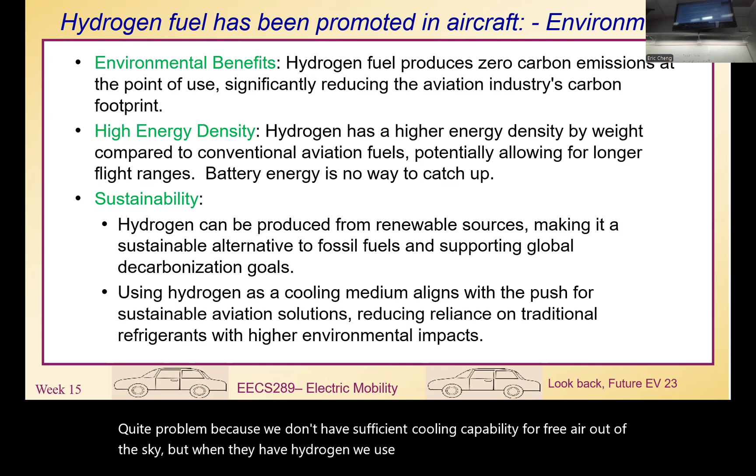But when we have hydrogen, pressurized hydrogen or liquid hydrogen, and we release the hydrogen, we automatically generate cooling for the aircraft. So that will be a really good combination to use hydrogen fuel for aircraft. That's why we're able to produce better heat transfer. We can use the phase change in the cooling system to support a lot of cooling. And also hydrogen is lightweight, high density. The specific energy is better than ammonia, because H2 compared to NH3 is much better in weight density.

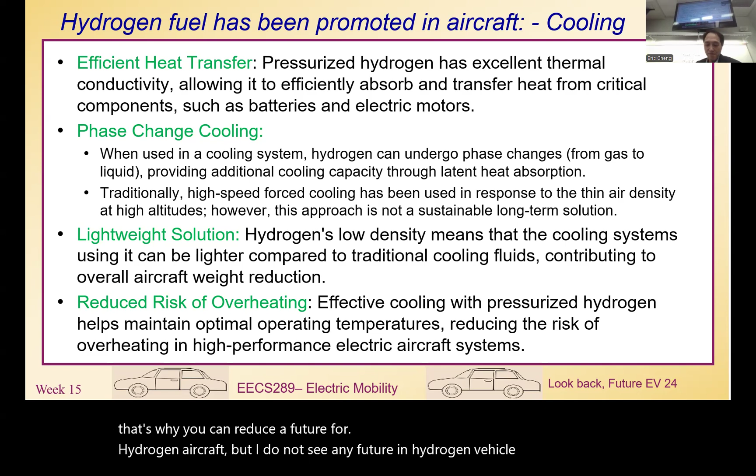Then this pressurized hydrogen is able to support any cooling issue in aircraft, so we can use an electric propulsion system together with hydrogen to do the job. That's why we do see a future for hydrogen aircraft, but I do not see any future in hydrogen vehicles yet. Of course, for this kind of hydrogen aircraft, we tend to use a hydrogen fuel cell. So the hydrogen fuel cell together with the cooling performance is able to make the aircraft really, really possible.

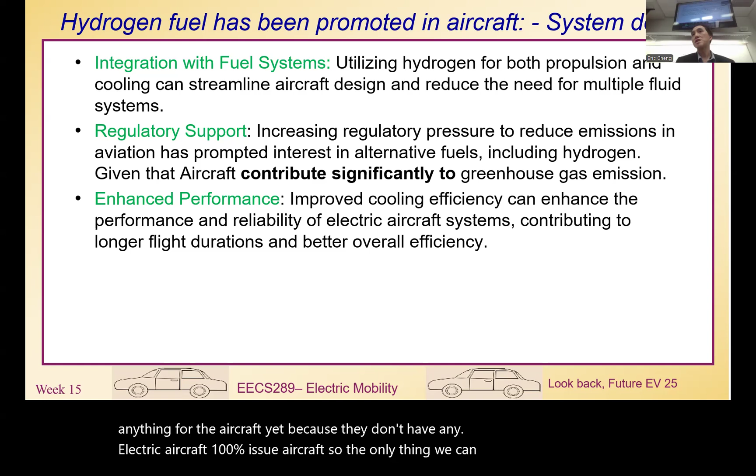And also, a lot of airports have been implementing zero emission criteria. The key reason is all the green associations require 100% zero emission. But the aircraft system is difficult at the moment. They only try to change all the ground vehicles at the airport to zero emission. Today, you can see that at many international airports, any vehicle going inside the airport area must be using green technology. But they haven't solved anything for the aircraft yet because we don't have any 100% electric aircraft. So the only thing we can do will be using hydrogen aircraft.

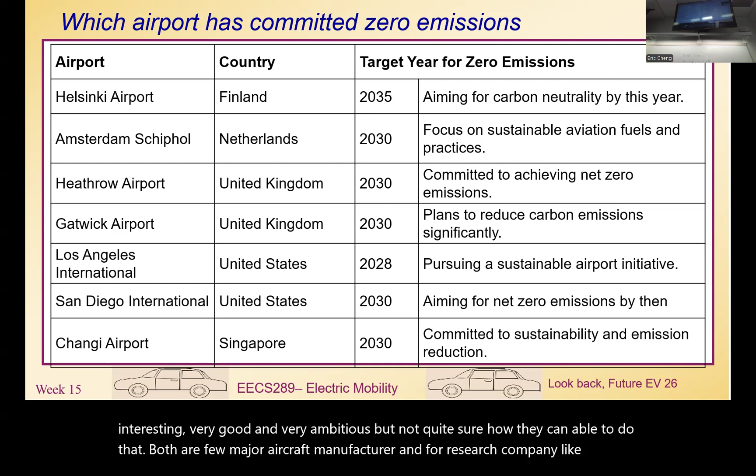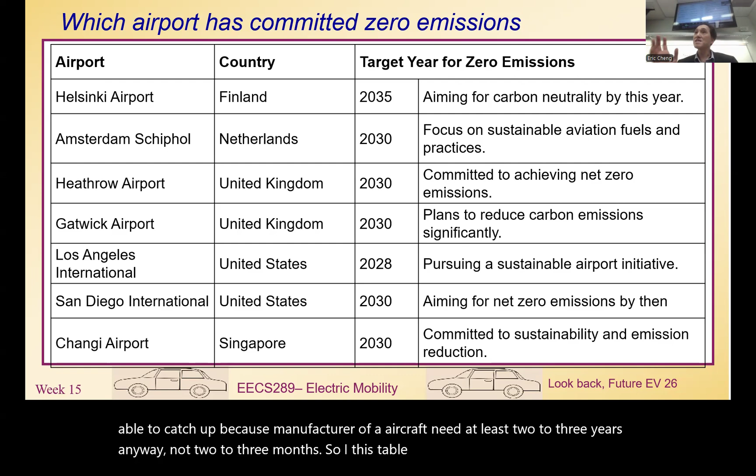So this table looks interesting, very good and very ambitious, but I'm not quite sure how they are able to do that. A few major aircraft manufacturers and research companies like Rolls-Royce have been looking into hydrogen jet engine systems, and they're also looking into hydrogen fuel cell systems. But I don't think by 2030 they are able to catch up, because manufacturing an aircraft needs at least 2 to 3 years, not 2 to 3 months. So this table is interesting, but we can see the mission, the theme for all the airports, what they try to do.

So the thing we need to work on is that hydrogen fuel has been promoted in aircraft. Hydrogen storage will be important. For hydrogen powered aircraft, we can use a fuel cell or a hydrogen jet engine to do the job. In this case, we are able to have really zero emission. And also we try to prove the technology for hydrogen. We have been doing a lot of good work for ground vehicles, fuel cells, hydrogen storage on the ground. So this technology is really nice for us to move on to the sky, to aircraft applications. The technology is here, but we need a further push from the government and the next generation to move on to aircraft. And also public interest. We all know that the major emission is from aircraft.

The thing is aircraft usually account for one third of the total emission. Ground vehicles, we already improved so much because we are using a lot of EVs. But for aircraft, we see a major problem because they're international, they need to travel for long hours. So that means using batteries is impossible. So the public image will be, we need to do something for aircraft.

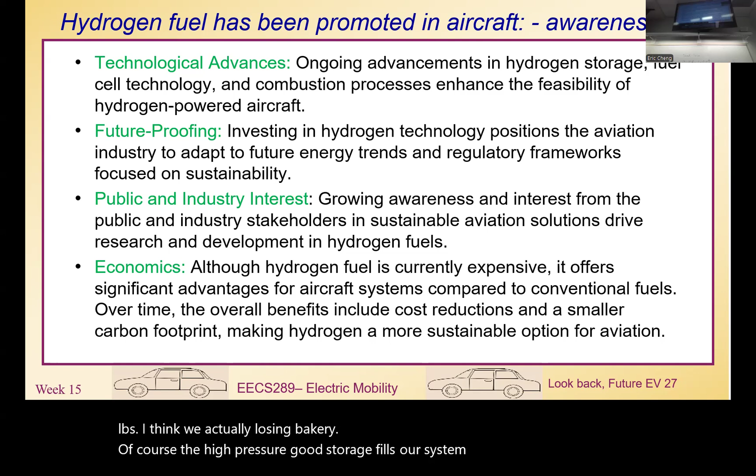All hydrogen aircraft basically can move on to liquid hydrogen, that means minus 260 degrees C. But the technology here, we are able to do it. Not for ground vehicles, but for aircraft we got more facility, we got more margin to use liquid hydrogen.

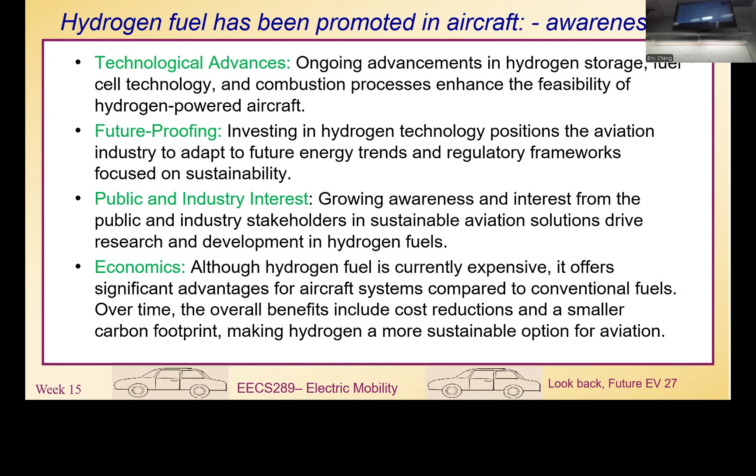So what do you think? I think ammonia would be a better choice, because hydrogen would be kind of difficult. For a long flight, we will need a much larger tank for hydrogen, right? To store that in a pressurized form, the tank's weight is going to be too much.

That's true, yeah. I think it might be for short range, not long range. Okay. And also, if they start using hydrogen in aircraft, they will also have to manufacture hydrogen in a green way, and that also needs a lot of infrastructure, because right now it's just way too expensive. And why would airlines do that?

And if they raise the prices, people would say just go back to carbon emissions. We don't want to pay so much for the flight. Right? What do you think?

Well, it's obviously much more likely there's more push to develop for aircraft versus vehicles, because batteries are not really an option for aircraft because of the weight. So while these are all issues, like green hydrogen production or storage of hydrogen, they're much more likely to try and advance that technology for use in aircraft, because there's no other option.

It's either jet fuel or hydrogen or ammonia, yes. But batteries are not an option. Only for very short range can batteries be used. So you need something else for longer range. So there is an economic reason to start using hydrogen. Because eventually, if you want to be zero carbon emission, you need to use it. You don't have a choice.

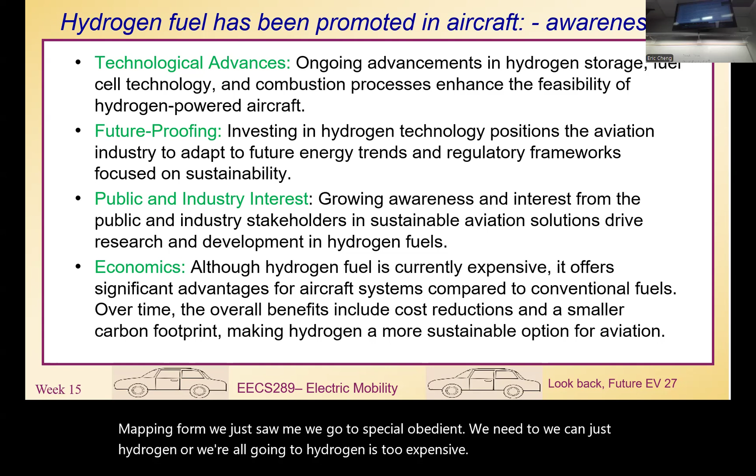That's true. I think all your comments are really good. I think for really short range, we can use battery. For medium range, we can use hydrogen. For really long range, hydrogen is too expensive, probably quite impossible. At the moment, hydrogen cost is still so high, from the analysis, 10 times.

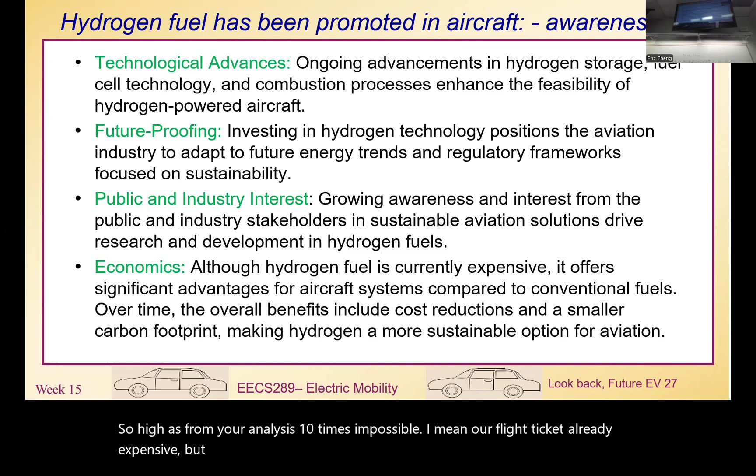Impossible. I mean, our flight tickets are already expensive. The fuel will cost half of the flight ticket. That will be another 5 times more expensive. That will be impossible. So unless the hydrogen fuel can be much lower, but I don't see that in the near future yet. So without lower cost for hydrogen, I can't see any future for hydrogen aircraft, only for medium or short range.

But zero emission for aircraft, the only solution might be hydrogen or ammonia. Cannot be battery, impossible. I don't think battery energy density can increase by 10 times. At least I think the battery energy density would need to increase by 20 times to be good for aircraft. Because aircraft are usually for international travel, right? So that's why there are a lot of questions there.